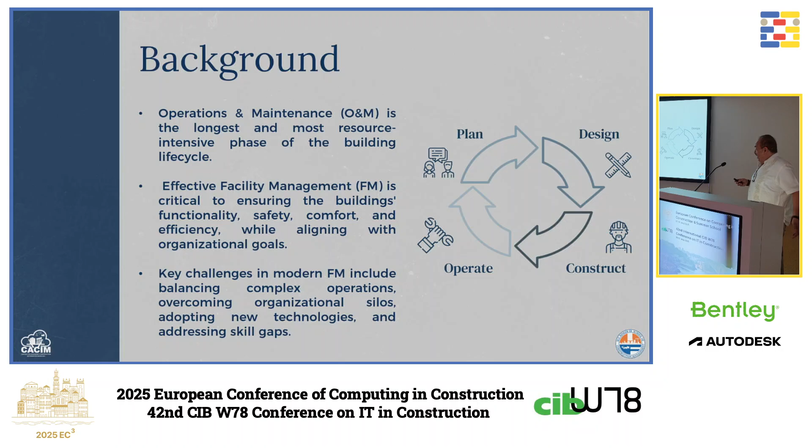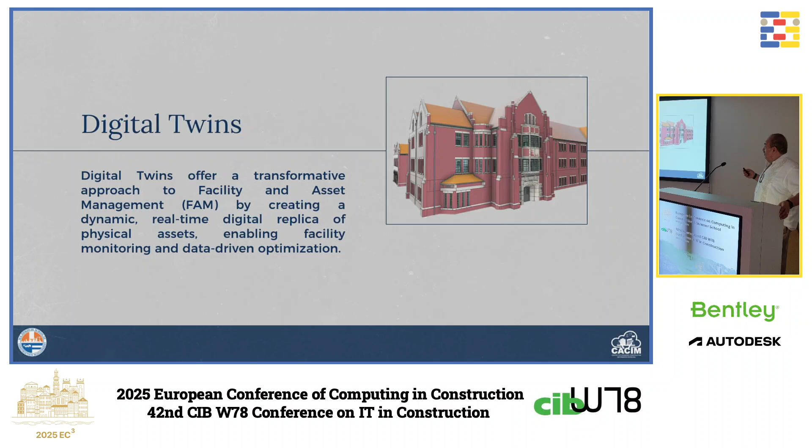Currently what we did is we took the building information model and used Autodesk Tandem and created a digital twin, and that was the status twin. Our goal is to go from a status twin to an AI-driven digital twin or even a cognitive twin.

The issues in machine learning ready digital twin infrastructures are the continuous integration of all the building data streams, automated ETL standardization, open APIs and extensibility. There's a lot of telemetric streams that we have to integrate and match.

The predictive edge of this is we can get, with the energy system we're using here, next day key performance indicators, detect faults, activate actuators, and optimize the scheduling.

So instead of doing maintenance once a quarter, using a digital twin system, we can do maintenance every day. We can observe the operations every day, or every hour, or every minute if we want to. So it's continuous O&M.

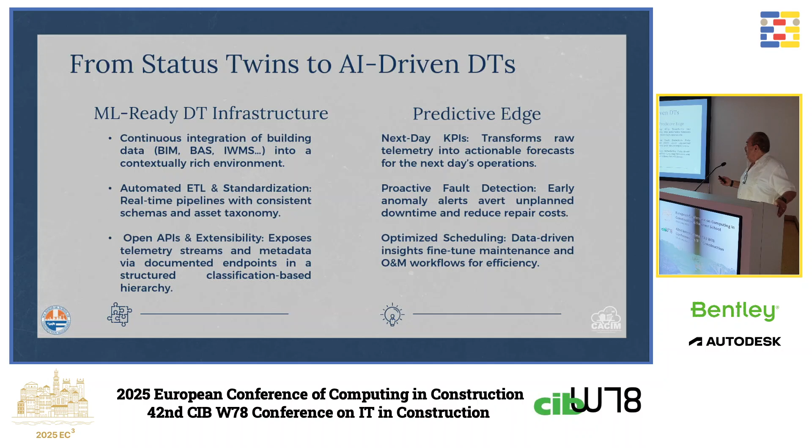The research gap, as we see it, is implementation, interoperability between computerized facilities management and BIM. They're both in data silos, and we need to seamlessly integrate this. There's a lack of standardized workflows. Everybody has their own process.

The scalability - current research, as we noticed earlier today, is based on single buildings. Our goal is to have a campus-wide system where this is really effective when you're looking at hundreds of buildings, energy savings, energy consumptions, and predicting the consumption. All this is also impacted by the difficulty in scaling up the solutions.

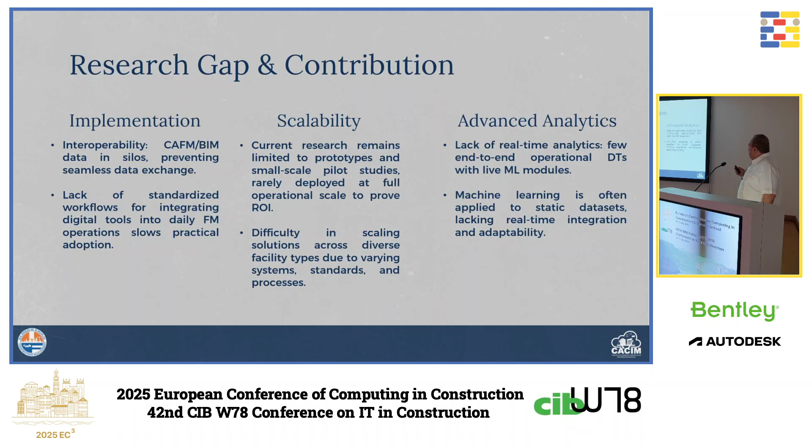We're using advanced analytics here as well as machine learning. So the case study: we developed a live digital twin and deployed it for operations and maintenance. Embedded in it, there was a machine learning process, and the building we looked at was a 3-story academic facility.

It had existing digital infrastructure, building automation system, workplace management system, BIM, and there was active collaboration with the campus facility services and IT departments.

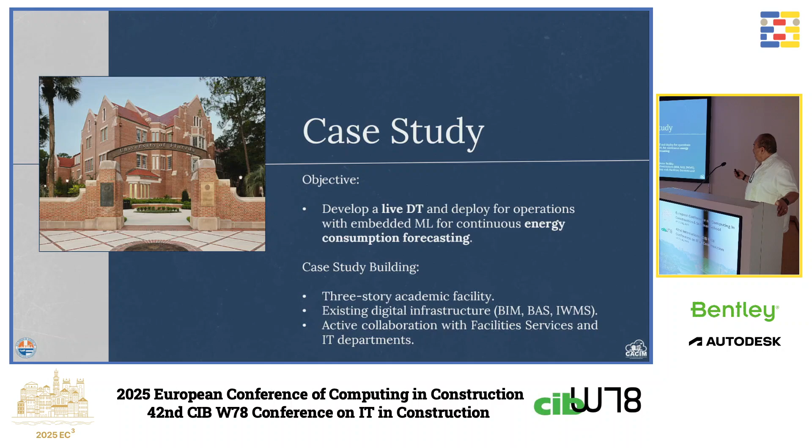This is our technology stack: Autodesk Tandem, the data sources, API, the ETL, ML, using Python, Keras, and Pandas. These are the layers we integrated.

You can see the integrated workplace management system, the building automation system, the document management system, the asset management system. All of those were integrated in the digital twin. Here is the data population that was fed into the building.

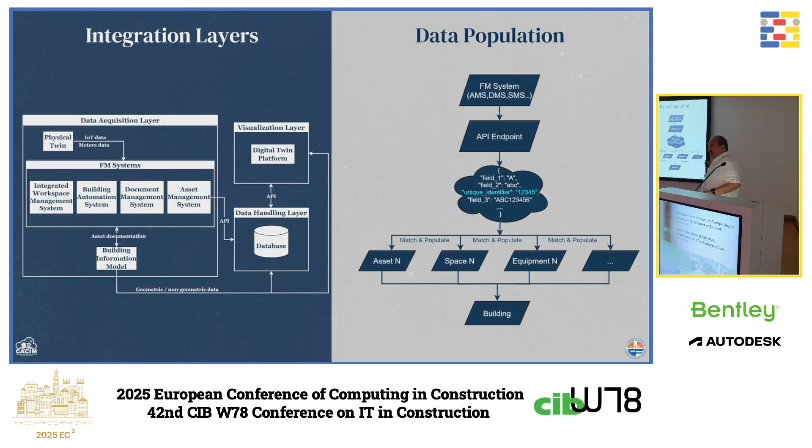From an owner's perspective, they're getting high-level performance metrics, cost insights. They can use it for strategic planning.

When facilities managers and maintenance teams look at real-time operational data, there's fast incident tracking and resolution, and they're alerted when there are critical equipment failures. The occupants, of course, are given their comfort space availability, so you can schedule rooms, schedule classes, and things like that.

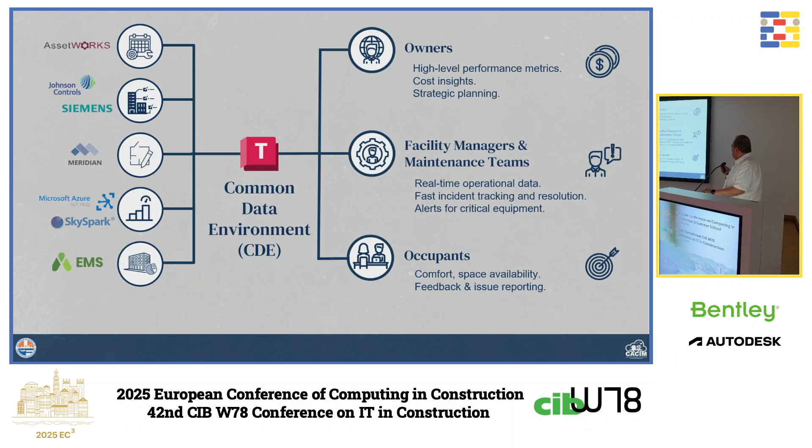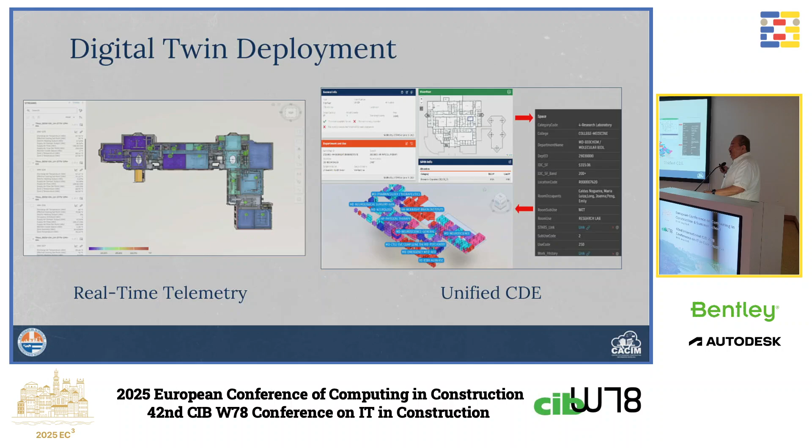So this is the digital twin deployment. On the left-hand side, you see a heat map of the temperature in the building. On the right-hand side, you see room usage, space usage in the building.

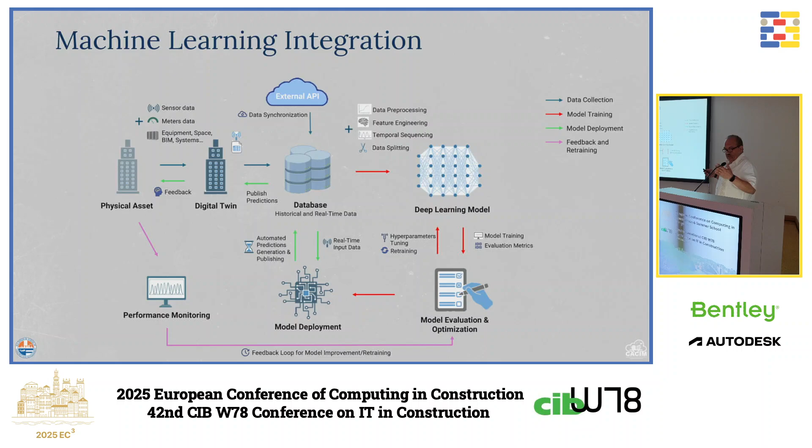Once we predict and validate that, that becomes part of the data, and we predict the future.

If we look at this, ingest is historic data and live feeds from the sensors, meters, and weather. We align the timestamps of all of these and aggregate it.

Then the learning process - there's contextual data. We feed in there the holidays, the operating schedule, because on holidays, of course, energy consumption is low. And then we have the rolling window sequence that looks at so many days ahead.

The model selection and tuning - we use the long short-term memory algorithm, and we use neurons and dropouts. What we published was we get the weather forecast, generate new predictions using this trained model, and post via the API pipeline.

To the digital twin, the predicted consumption. And then we auto-retrain when the mean error reaches a certain level.

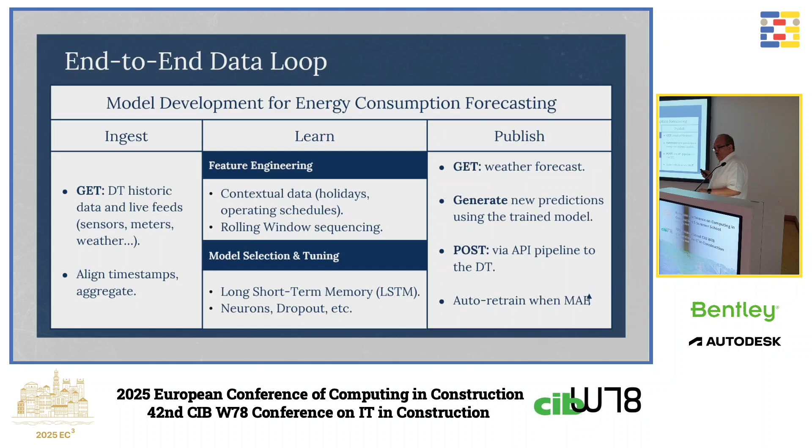So these are the performance insights. You can see the model captures short-term dependencies and seasonal shifts in energy consumption.

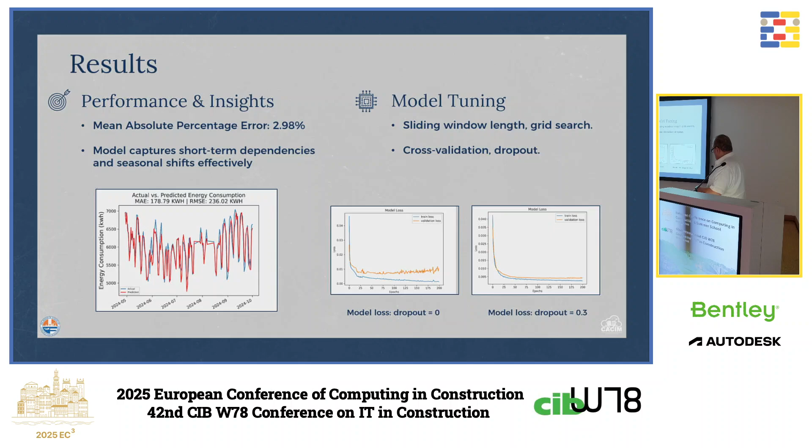And the model tuning - here's the sliding window on the right-hand side. Dropout equal to 0, and dropout equal to 0.3.

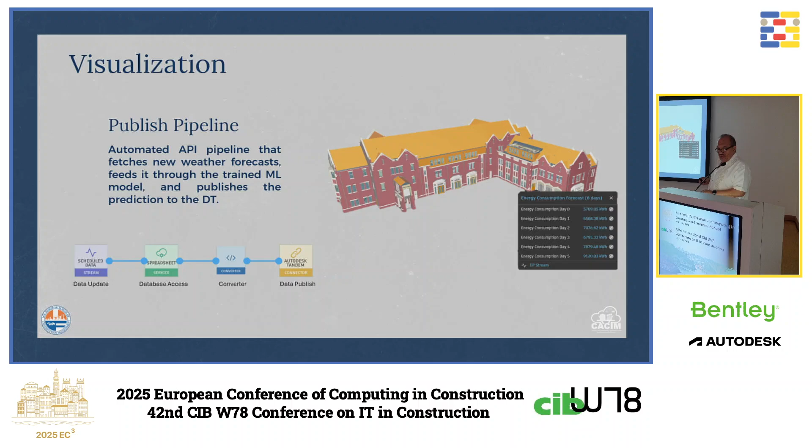And then we publish all this data, so you can see energy consumption day 0, day 1, day 2, day 3. So if you had a solar array feeding the building, then you can determine how much energy you have to purchase from the grid to meet your demands, for example.

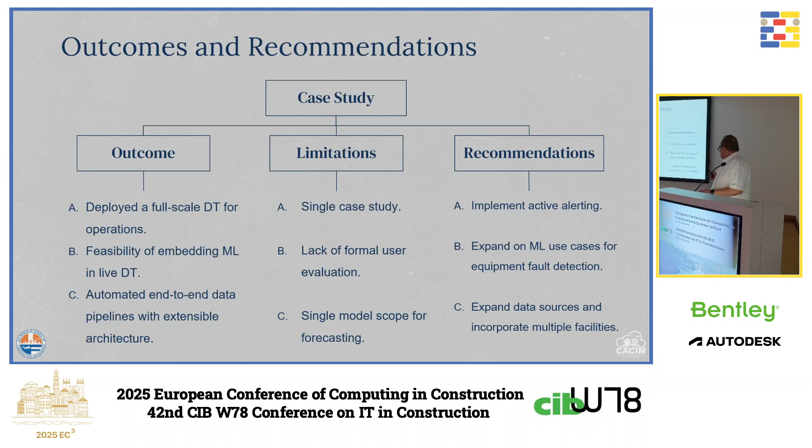Questions? I know that was fast, but.